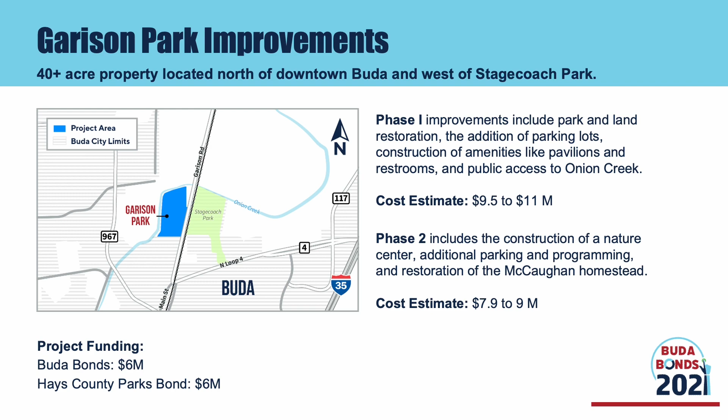Phase 2 will include the construction of a nature center, additional parking and programming, and the restoration of the McCaughan homestead, and is estimated to cost $7.9 to $9 million. There is currently $12 million available in funding: $6 million from the Buda Bonds and $6 million from the Hays County Parks Bond. The park was also identified in the City of Buda Parks master plan as a special natural area with potential to provide outdoor recreation space in the middle of the fast-growing city.

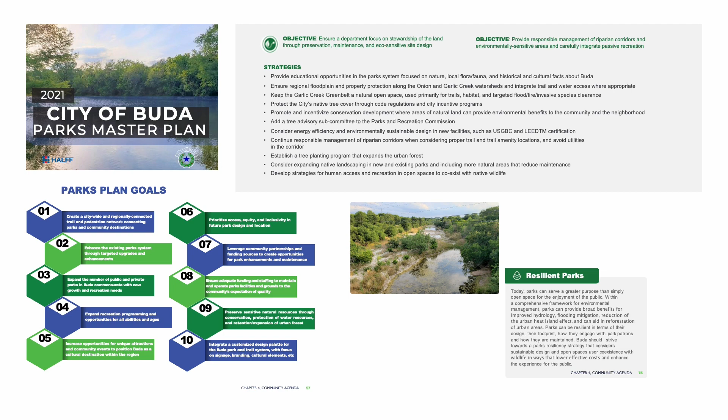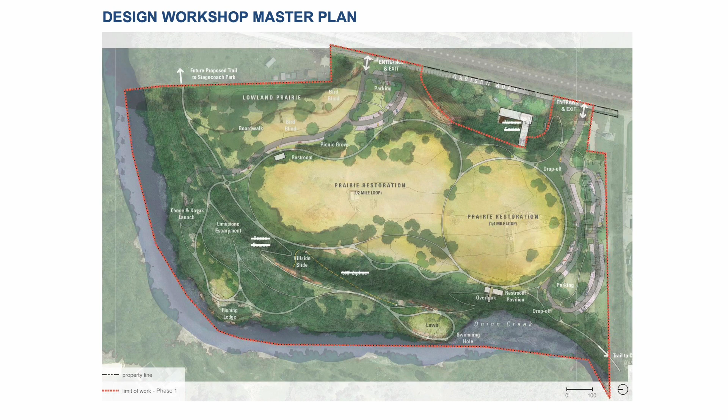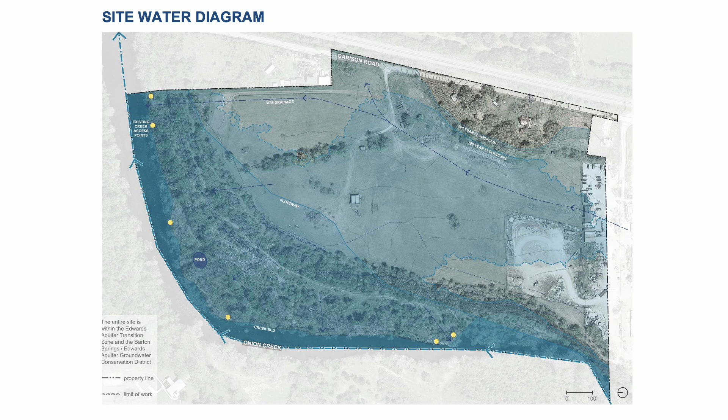As our team began schematic design, we made several site visits to the park and recorded our observations, testing the elements of the 2016 overall plan against what exists out on site today. After creating a series of diagrams to test different spatial organizations and relationships, we arrived at a schematic design plan.

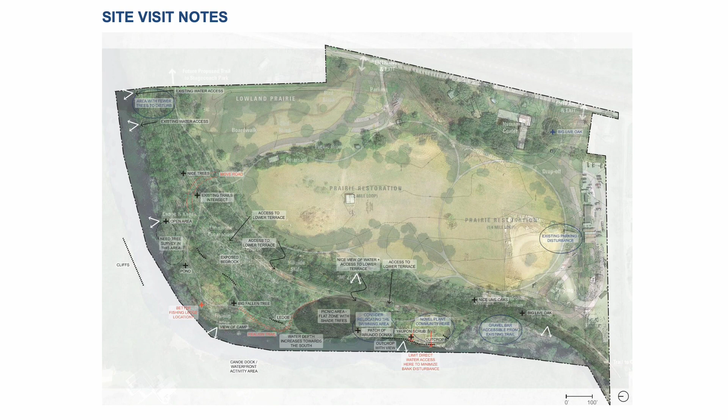Our schematic design plan for Garison Park honors and maintains the original goals of the master plan, namely: 1. Preserve the site's natural character and natural features. 2. Restore the former pasture into a native meadow of wildflowers and grasses. 3. Provide safe and universal access to Onion Creek for recreation. And 4. Provide the associated infrastructure to support the uses above: parking, restrooms, site furnishings, and trails.

From here, you can take a trail to a picnic area with a shade pavilion nestled among the row of existing hackberry trees that provide food and shelter for small birds. Or you can take a trail that connects you to the rest of the site. Bird blinds along the way curate opportunities to view different communities of birds throughout the park.

If you are coming to the park for more active amenities, you can enter at the south end, where we are proposing a new access point.

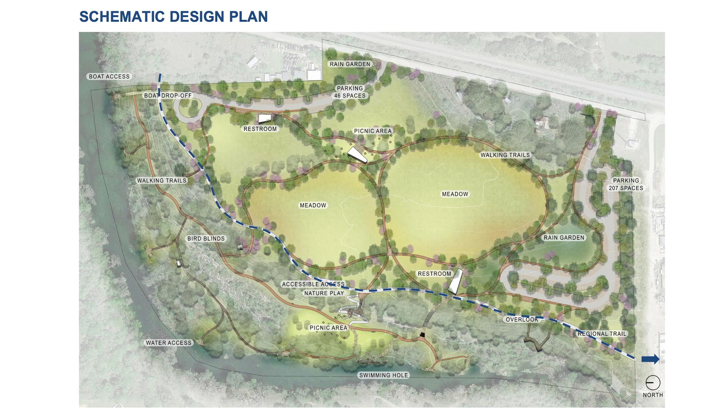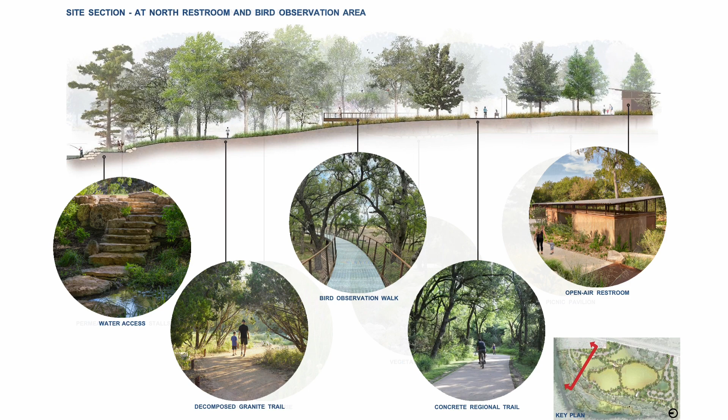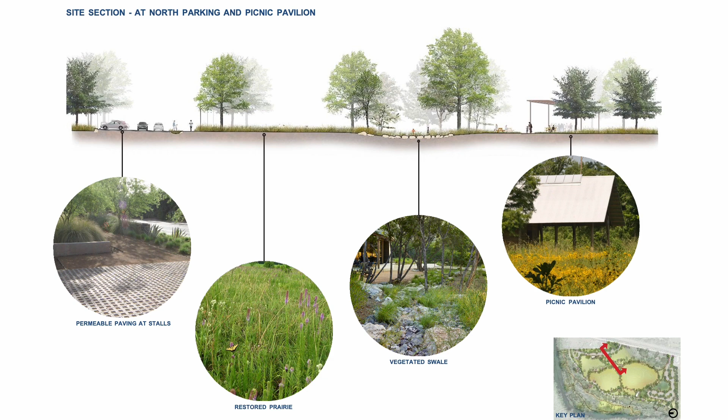In this section, from the right there is the picnic pavilion, planting areas with stormwater management features, an open area with trails in a restored prairie, and the small parking lot at the north entrance.

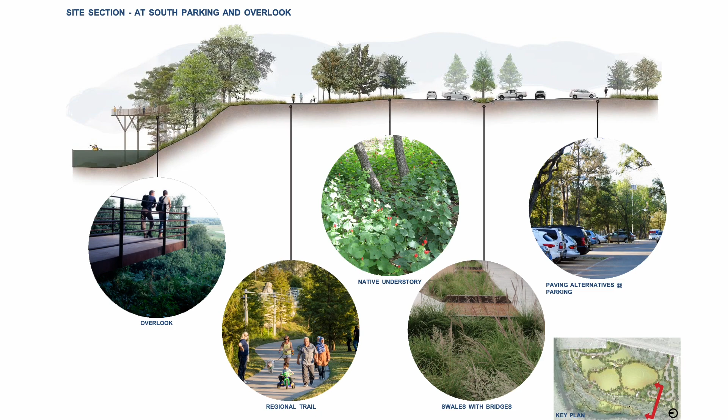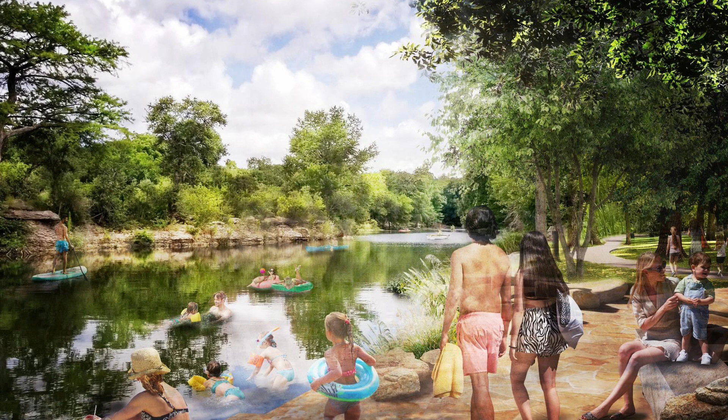This is the rendering of the swimming hole, with accessible access and views across the creek. You can see some stone seating at the water and the creekside trail in the background. Next, we have a plan enlargement of the play and picnic area just to the north of the swimming hole, and again, the arrow points to the view you will see.

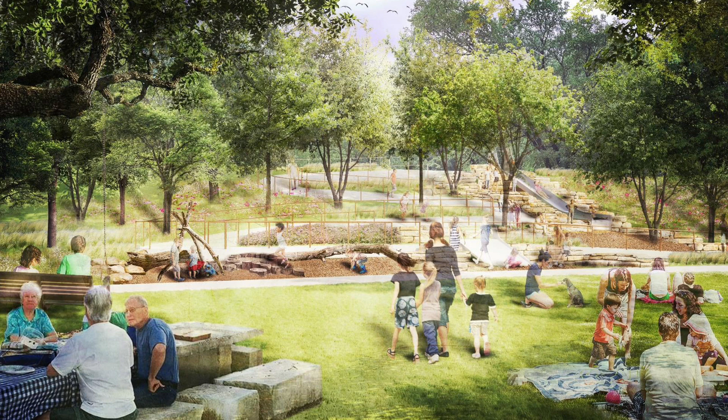This rendering shows that hillside ramp and play area, which will be ADA accessible. You can see embankment slides as well as some nature play elements, which will be things like logs and tree branches reclaimed from the site.

Stone picnic tables will be laid out in a grassy area under the existing trees for picnicking, and there will also be bench swings from the trees for more playful seating.

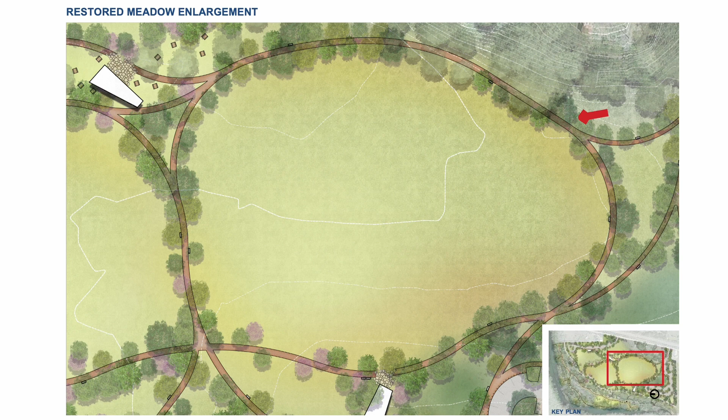Moving up the bluff from the creek to the large open area, we have a plan of the restored prairie, which has plenty of walking trails and stone benches for seating along the way.

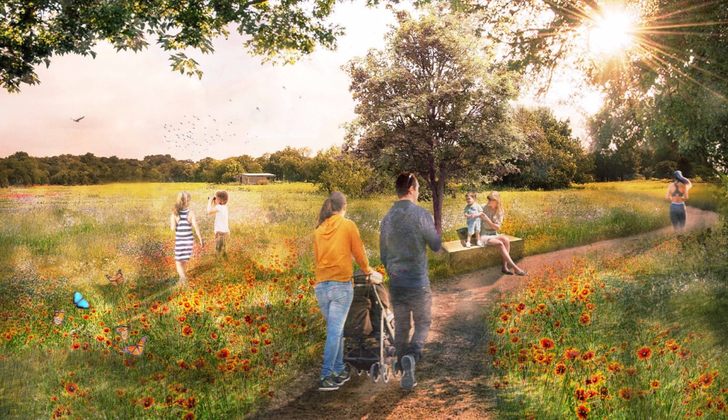The ecological goals of the project include an increase in tree canopy, improvement in plant diversity, reduction in invasive species, and a green stormwater infrastructure to preserve the water quality of Onion Creek. These efforts will also increase bird and pollinator diversity, specifically in the meadow and upland woodland areas.

The restored prairie will provide opportunities for running trails, nature walks, educational programming, and bird watching.

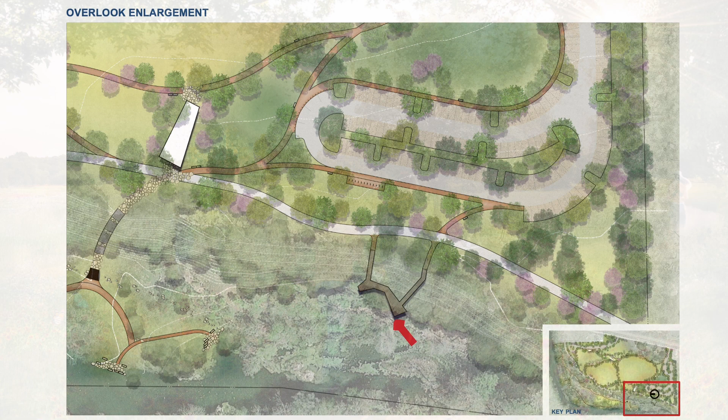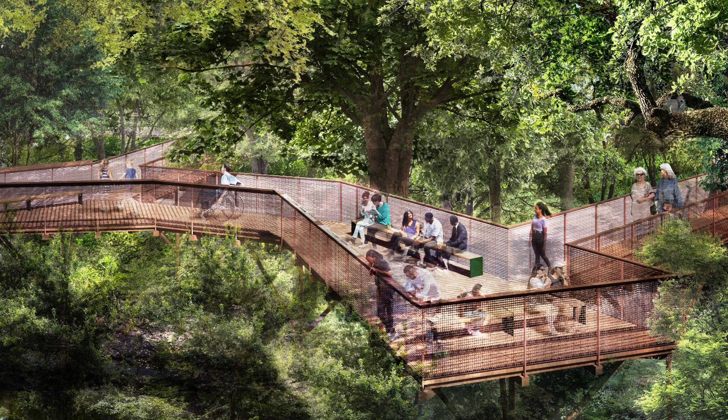Lastly, we move south to the overlook, which will be perched along Onion Creek. This rendering shows the structure set into the hillside, designed to protect the existing mature tree canopy, especially the incredible live oaks.

The overlook allows park users to walk among the treetops and take in views across the creek. It provides shaded seating and a unique experience within the Buda Park network.